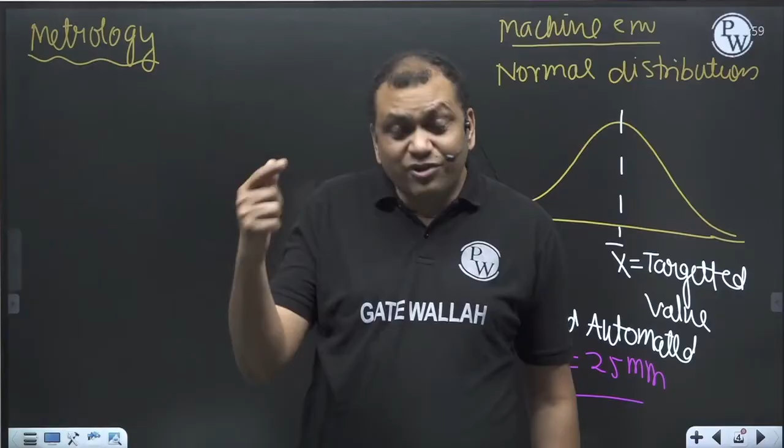So as the products are coming out of the machine, you are inspecting each and every shaft. If you do that, you will get dimensions like 25.023, 24.972, 24.996, 25.004. No two dimensions will match, and there will be variation in the dimension.

You know why? Because machine error follows a normal distribution. This is 3 sigma on this side, 3 sigma on this side, and within 6 sigma, there will be 99.73% of components - this is the standard deviation.

The sigma, or standard deviation, depends upon the type of machine, number one. If it is an NC or CNC, sigma will be less; if it is a conventional machine, sigma will be more. Number two, standard deviation also depends upon the skill of the operator. If the operator is highly skilled, sigma will be less; if the operator is a new person, sigma will be more.

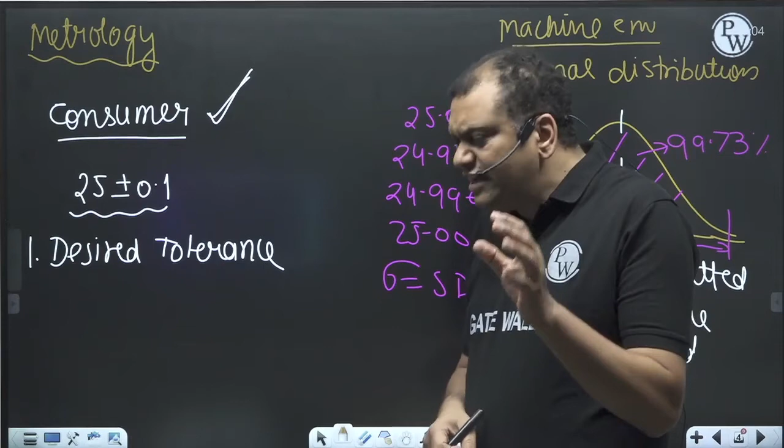So desired tolerances are given by the consumer, correct? And the second is the process capability.

Process capability is nothing but 6 sigma. Sigma is the standard deviation of this normal distribution. The 6 sigma is the property of the machine, and the desired tolerance is the desire of the consumer. Tolerances are the selection of the consumer, and the process capability is the capacity of the machine. If the machine is NC or CNC, 6 sigma will be low. And if the machine is conventional, 6 sigma will be more. I hope this is clear.

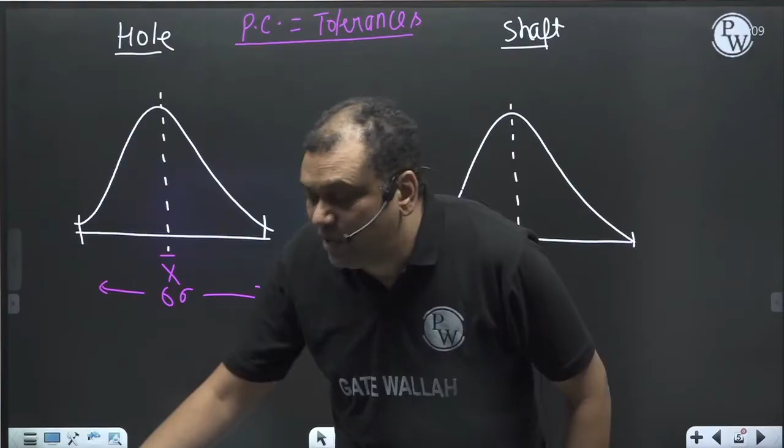Now, randomly if you pick a hole, and randomly if you pick a shaft, random because normal distribution means randomness. Randomly if you pick a hole from the hole lot, a shaft from the shaft lot, assembly can be made without any inspection. Assembly can be made, okay? And this system is called full interchangeability.

So when will the full interchangeability system come? When desired tolerances are equal to the process capability.

Is that okay now? Now, what is a hole and what is a shaft? How to define a hole? Any internal feature of assembly, which may not be circular, is called a hole, and any external feature, which may not be circular, is called a shaft.

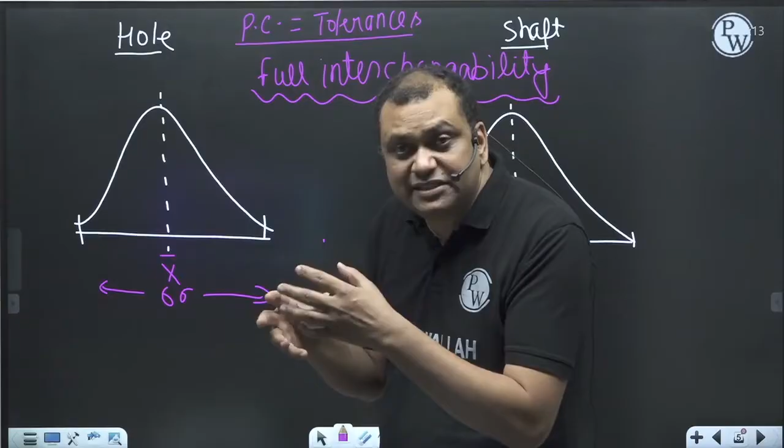How? Suppose there is an assembly, and during service the shaft fails. You don't have to throw away the entire assembly. Just purchase another shaft from the market and fit it. Maintenance becomes cheap and easy this way.

It will work, so we want a fully interchangeable system. But in the real production scenario, process capabilities are more than the desired tolerances. That is the reason I am not able to get a fully interchangeable system, because process capabilities are more than the desired tolerances.

So now what to do? Let us take one example. Process capability is 4 times the desired tolerance. This particular example is taken practically in all the possible books.

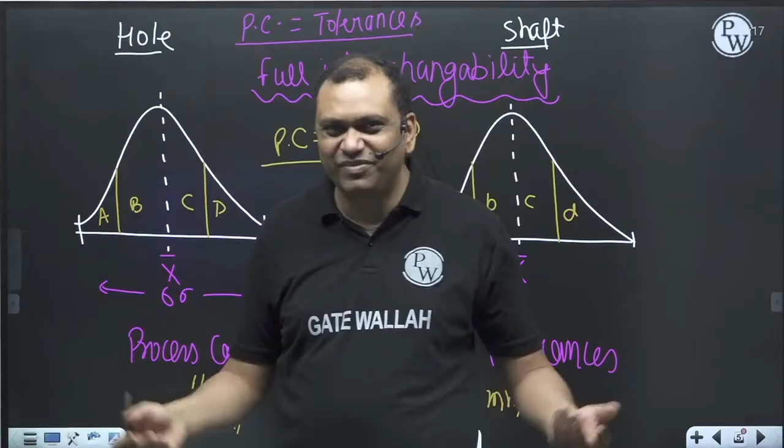So this is 25, 25.1, 25.2, 24.9, 24.8, and the same for the other: 25.1, 25.2, 24.9, 24.8. So do you know what I'm going to teach you now?

What I'm going to teach you now is practically how you are going to break the process capability into 4 equal parts. As the shafts are coming out of the machine, I will inspect each and every shaft, and as per the dimension, I will place it in the respective subgroup. I will have 4 drums: drum A, drum B, drum C, and drum D. Let us say the dimension is 25.16 — put the shaft in drum D. If the dimension is 24.92, drum B. If it's 24.89, drum A.

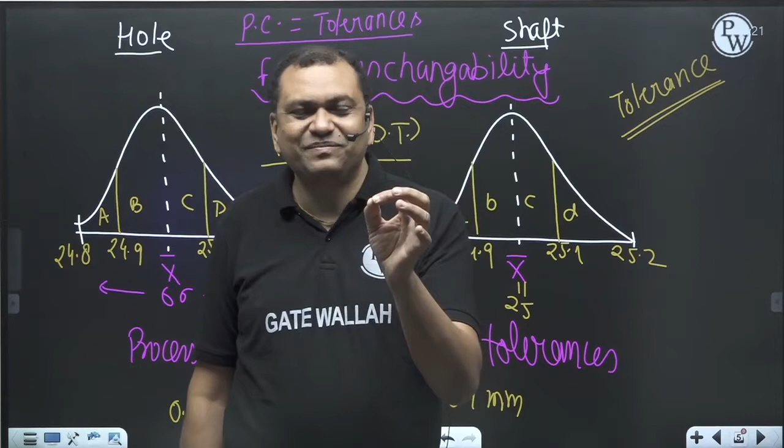Whenever I use this term tolerance, I always refer to a group of components, not a single product. Tolerances are for a group of components, not a single product. Tolerance tells you that in this subgroup, this will be the variation in the dimensions of the product.

So now each and every subgroup will have few pieces. And the beauty is that in each and every subgroup, variation in the dimensions are equal to the desired tolerance. By doing this procedure, each and every subgroup is having variation in the dimensions equal to the desired tolerance.

So if you pick a shaft from subgroup small a, and if you pick a hole from subgroup capital A, assembly can be made. Why can the assembly be made? Because the dimensions are within the desired tolerance. If you pick up a shaft from subgroup small a, hole from subgroup capital A, because the variation in dimensions is equal to the desired tolerance, assembly can be made.

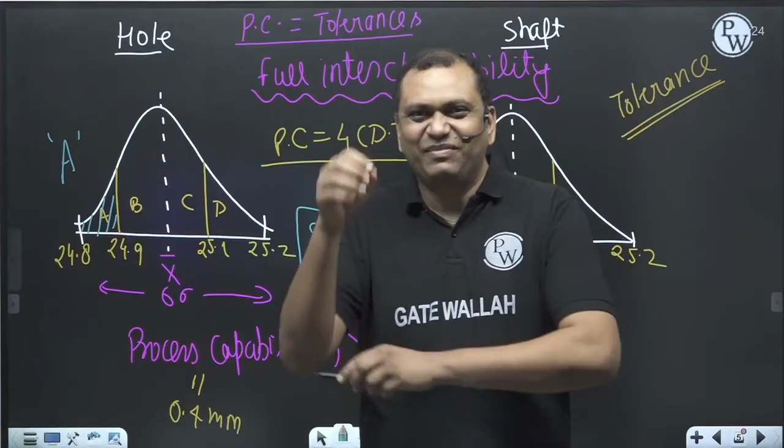So it's a very, very important thing, because it's a recorded lecture, I am not able to see all of your faces. Always remember, if you want to learn anything, respect teachers, respect parents, respect elders. If you disrespect them, immediately the learning process is blocked.

But one more question is there. Of course, parents we have to respect. Elders and teachers, if they have bad character - because nowadays everybody can become a teacher, it is driven by money in most cases - if they have a bad character, please do not respect them. Otherwise, bad character will go to your heart. If you respect by heart a person having bad character, those bad qualities will come to your heart. So please remember this very, very important thing.

I teach students because I consider them as my children, and I really love all of you, because you will be seeing these recorded lectures. So this is a very, very important concept. Please follow this, and you will always be happy in life. Many people are giving short lectures and all that about how to be happy, but you cannot be happy unless and until you do this thing.

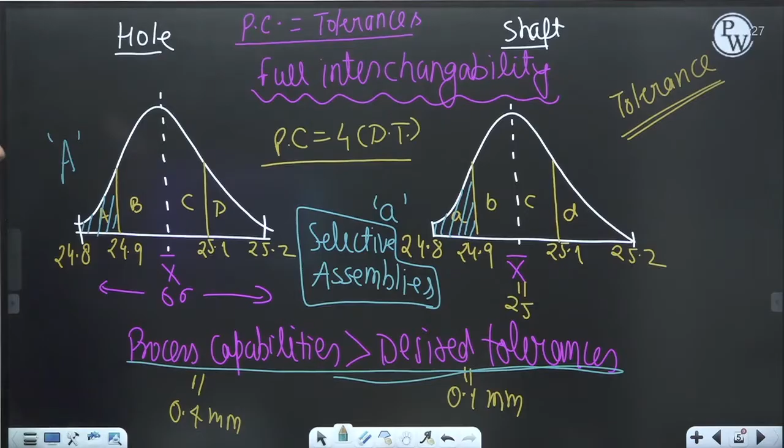So next, just a minute, because I drink a lot of water. Since childhood I have this habit of drinking a lot of water. It keeps our health in a better way.

Let us say in any assembly you are using shaft from this subgroup. Because of some reason, let us say the shaft fails. Then what you will do is go to the market. In Delhi, that hardware market is Chawri Bazar behind Jama Masjid, and in Hyderabad, it is Raniganj.

I don't know which city you are in, but every industrial city will have a hardware market. So if you go to the market, you have to give three pieces of information to the shopkeeper. Only then will he pick the right product and give it to you.

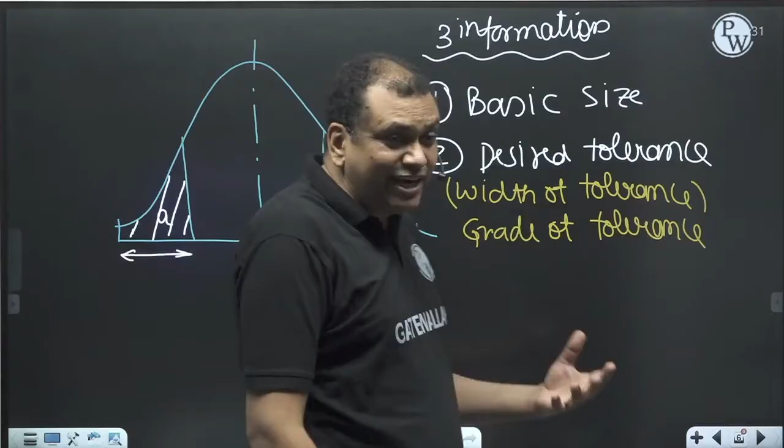Second thing you have to give is the desired tolerance. Desired tolerance is also called the width of the tolerance zone, and the width of the tolerance zone is also called the grade of tolerance. All three have the same meaning. So the second information you have to give is, what is the grade of tolerance? Is that okay with everyone?

And the third information you have to give is how far the tolerance zone is situated from the basic size. This distance, this is the basic size. So how far is the tolerance zone situated from the basic size? It is called the fundamental deviation.

So what is the definition of fundamental deviation? It is the distance between the basic size and the limit closer to it. Or in other words, how far the tolerance zone is situated from the basic size. It's called fundamental deviation, or fundamental deviation is the distance between the zero line, which is the basic size, and the limit closer to it.

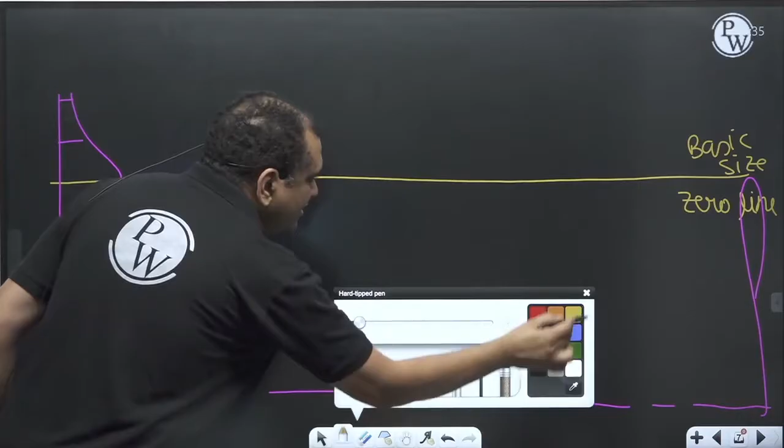So dimensions are increasing in this direction: A, B, C, D. This is 25, this is 24.9, 24.8, so A is between 24.8 and 24.9. It's the diameter of a shaft, 25. So A will fall here, then B, C, D. If I take it out, this is the tolerance zone.

Dimensions are increasing in this direction. Tolerance refers to a group of products, not the individual product. So what tolerance tells you is that in this subgroup, this is the maximum size and this is the minimum size. This is also called the upper limit, and this is called the lower limit.

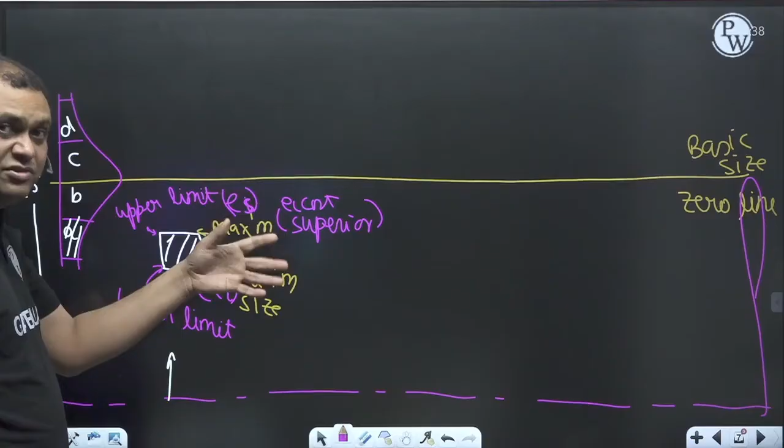So suppose the tolerance is here, this is EI inferior, ES superior, and in this case this is the fundamental deviation, and here this is the fundamental deviation. So fundamental deviation is the distance between the zero line and the limit closer to it. It can be the lower limit or it can be the upper limit. So whatever limit is closer to the zero line, that distance we take to quantify fundamental deviation.

So fundamental deviation is the distance between zero line and the limit closer to it. It can be lower limit or it can be upper limit, depends upon where is our tolerance zone, below the zero line or above the zero line.

When the tolerances are only on one side, either like this or like this, it is called unilateral tolerances. When the tolerances are only on one side of the zero line, either this side or that side, it is called unilateral tolerances.

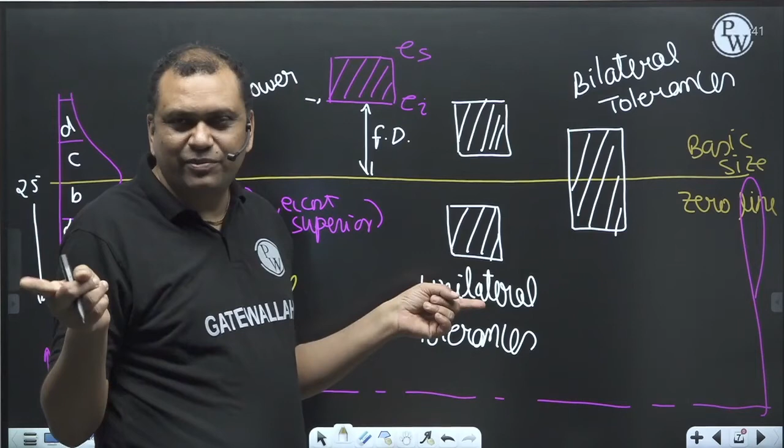So once again, tolerance means a group, not the individual component. And when the tolerance is spread on both the sides of the zero line, it is called bilateral tolerance.

Now, there is something called fit. Fit is called quality of assembly. In other words, relationship between hole and shaft before assembly is called fit.

Okay, and there are three types of fits. Of course there are subcategories, and those who understand Hindi, these things I have covered in the crash course in detail.

Suppose this is your hole, tolerance of hole, and this is the tolerance of shaft. This is the zero line. Zero line is nothing but the basic size.

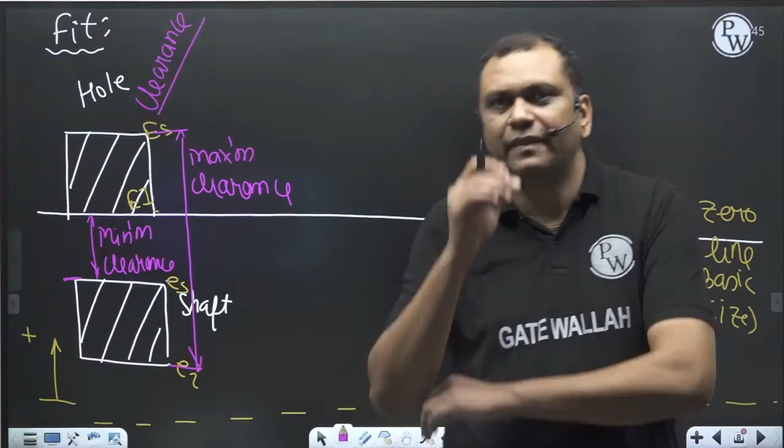Now, based on my experience, students struggle to understand what is maximum material limit and allowance. So I will speak very slowly here.

There is something called maximum material limit, or minimum material limit. I'm explaining what is maximum material limit. The dimension at which hole and shaft will have more weight is called maximum material limit.

So I can say that upper limit of shaft will have more weight, and the lower limit of hole will have more weight in it. So lower limit of hole and upper limit of shaft is called maximum material limit, and these are called minimum material limit.

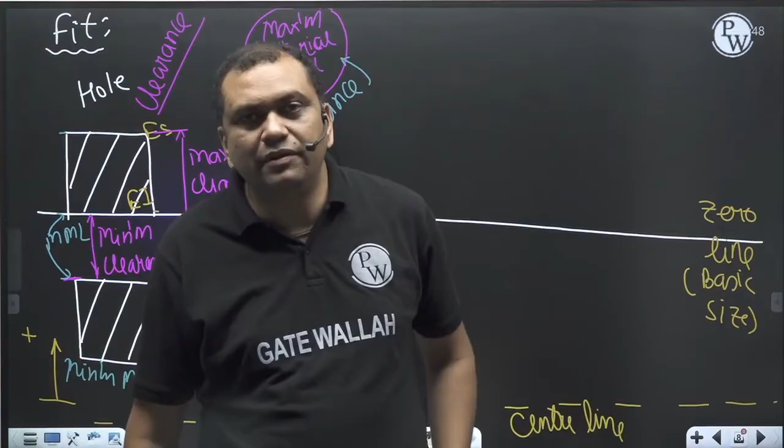Based on this, we define a term called allowance. Allowance is, in any assembly of hole and shaft, the difference between the maximum material limit of hole and shaft. Difference between the maximum material limit of hole and shaft is called allowance.

So here, for clearance fit, this is allowance. For clearance fit, allowance is equal to the minimum clearance. So this is a clearance fit.

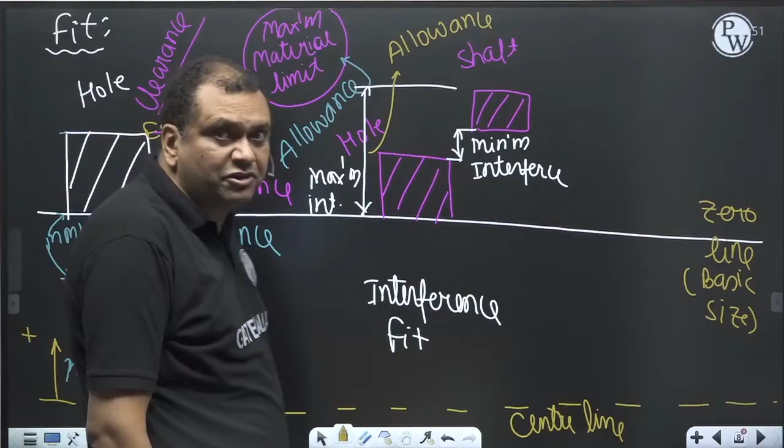And because our allowance definition will not change, maximum interference is called allowance. Definition of allowance will not change. What is the definition of allowance? Difference in the maximum material limit of hole and shaft is called allowance. Difference between the maximum material limit is called allowance, and allowance is equal to the maximum interference.

So interference fit. Now suppose there is an overlap. Let us say this is the hole and this is the shaft. If there is an overlap in the tolerances of hole and shaft, it is called transition fit.

So broadly, there are three types of fit, but each fit is divided into 2-3 subcategories. In one shot, I am not going into the detail of that — in the crash course, I have covered it. But in one shot, between 4 to 4.5 hours, we have to cover all the important topics of metrology and present it to you. That is the target of one shot. So there are basically only three types of fit: clearance fit, interference fit, and transition fit.

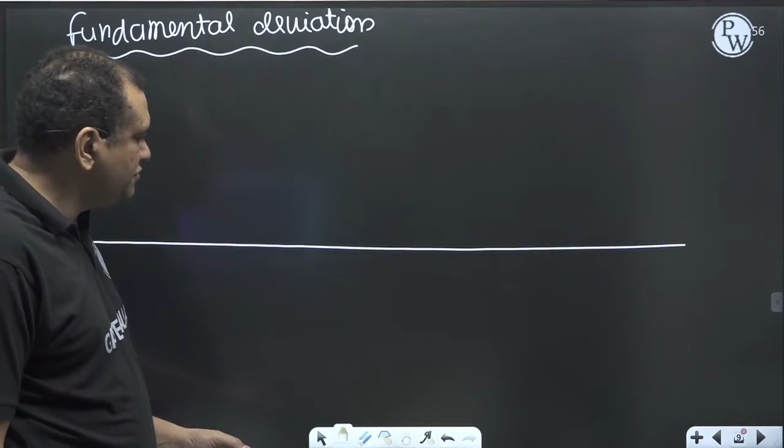So there are 28 different types of fundamental deviations. For holes, it goes like this, and for shafts, it goes like this. So both consumer and producer have to select from this available fundamental deviation — you cannot invent your own, otherwise maintenance will be complicated. A, B, C, D, E, F, G — some letters are missing and some are additional. Let us say A: for hole, we designate by capital letter.

This is the fundamental deviation of type A. So A, B, C, D, E, F, G, H will be here. Some letters are missing and some letters are additional.

For H type of fundamental deviation, see very carefully. Lower limit coincides over the zero line. So fundamental deviation is 0.

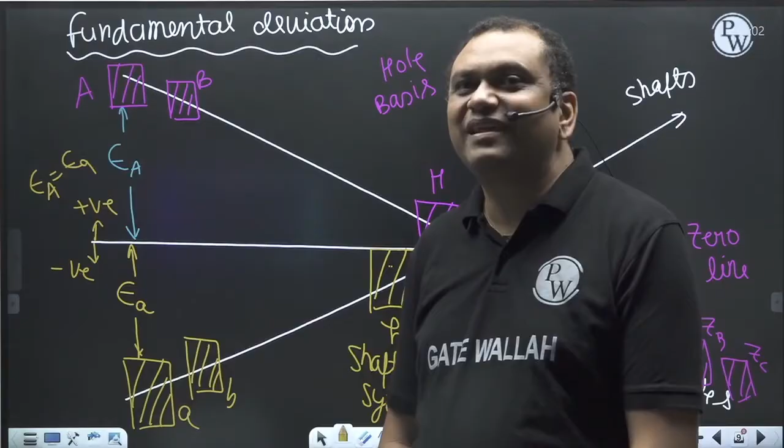Still, we will call it as a hole basis system because hole is my priority. 95% of cases, I make the hole first. So hole is my priority.

So the shaft goes in this direction and the hole goes in this direction. So as soon as the problem is given in the exam, this diagram should come to your mind, that where the tolerances are situated. Very, very important. You should know where the tolerances are situated before attempting the solution of the question.

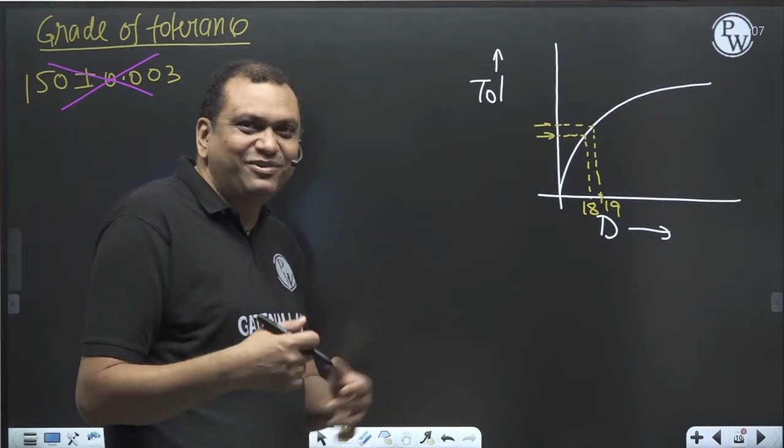So then they came up with an idea. What is the idea? Let us have same tolerances in a certain diameter range. They standardized these diameters: from 0 to 3, have same tolerances; 3 to 6, 6 to 10, same tolerances; 10 to 18, 18 to 30, let us have same tolerances. So in this range, have same tolerance.

0, 3, 6, 10, 18. Let us say this is D1 and this is D2. And this curve is passing through the geometric mean of these two, i.e., D is equals to under root D1, D2. The curve is passing through the geometric mean. That's the reason.

In your BTech you must have mugged up that on the y-axis it is called I. I is called fundamental tolerance. And the equation of this I is: I is equals to 0.45 d raised to power 1 by 3, plus 0.001 d. This is the equation of this curve.

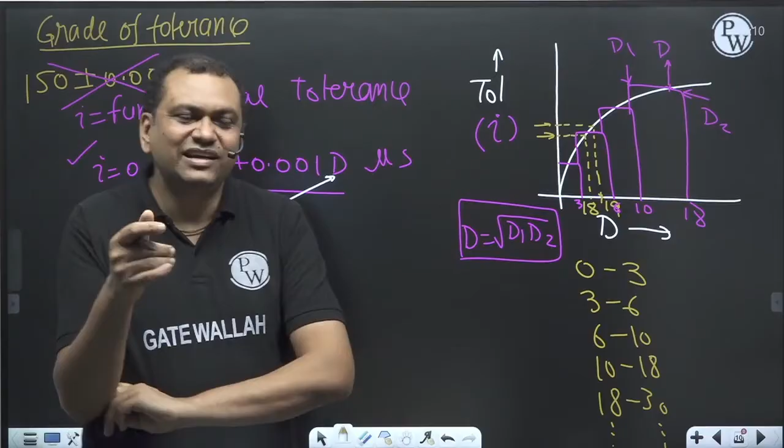So when people were developing this system, every tolerance was integer multiple of I. Integer multiple of I. Every tolerance was integer multiple of I. That's the reason I is called a fundamental tolerance.

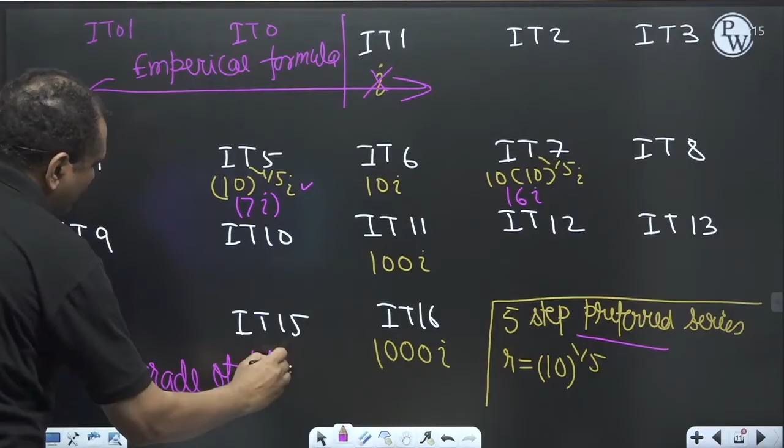Same thing here. Now from IT01 to IT1, they don't follow I — they have given empirical formulas. So there are 18 grades of tolerances.

So both consumer and producer have to select a grade of tolerance out of these 18, and fundamental deviation out of those 28. Both producer and consumer have to select from the available standards. Otherwise, maintenance will be a problem. Correct?

Otherwise, maintenance will be a problem if you don't follow the standards. Okay?

So now, something like this is given to you, 25 H7 D8. In exam, please remember, before solving the problem of limit, fits and tolerances, you have to make the fit diagram.

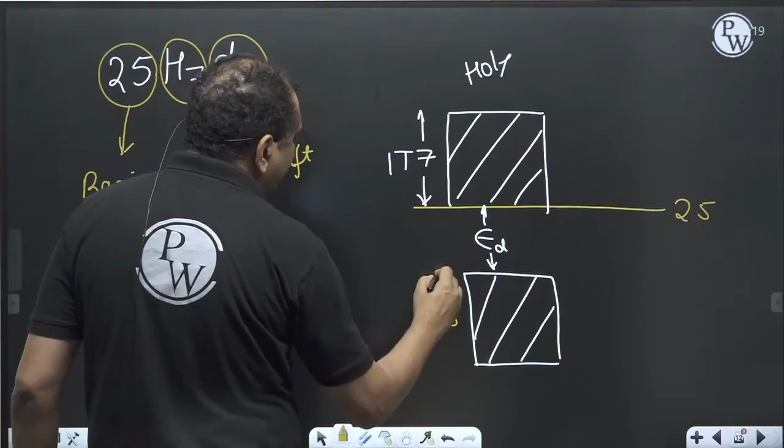D shaft, A, B, C, D, E, F, G, H. So D will be somewhere here. This is the fundamental deviation of D type. 8 means this is IT8. This is your shaft. So this is the fit diagram of this information.

So we can see from here it is a clearance fit. It's a clearance fit.

So once again, please remember, while attempting the questions of limits, fits and tolerances, please make the fit diagram first before answering. Otherwise, there will be a problem. Okay? All right?

We are going to solve some problem after maybe half an hour to see some sample problems.

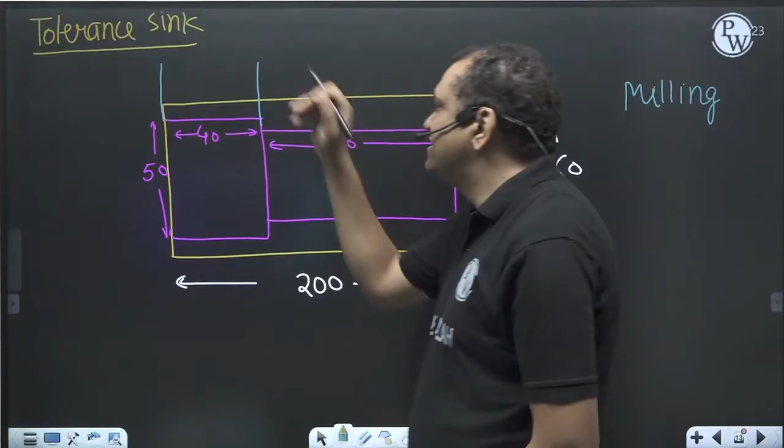In metrology, what we learned, we cannot make anything exact. So you cannot measure exactly 40.

So process capability of machine will appear as tolerance in this section. Let us say 40 plus minus 0.04. Process capability of the milling machine will appear as tolerance in this section. Okay.

Now what you did, you have taken out the semi-finished specimen from the milling machine and put it over a lathe machine. And with the help of a single point cutting tool, you are turning this section.

And once it becomes 35, you are taking this as reference, measure 140, and cut off from here. So 140. The process capability of lathe will appear as tolerance in this section. Let us say this is plus minus 0.07. Okay.

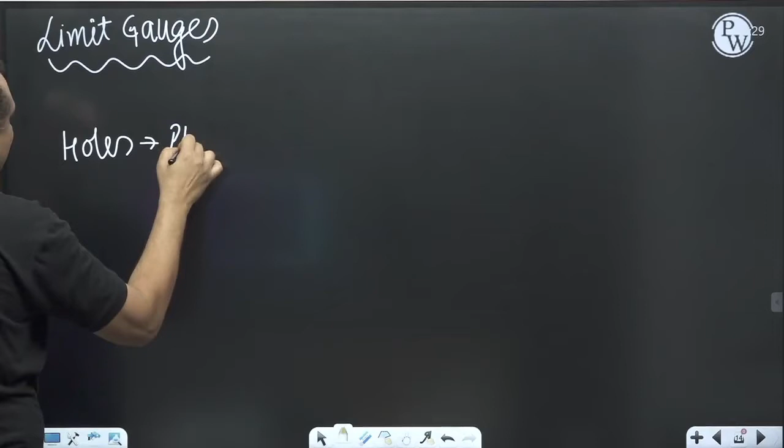Now for holes, we use plug gauges. Plug gauges are like this - it's a handle. And for shafts, we use ring gauges, and the ring gauges are like this. And we are carrying out inspection of shafts like this. So, for shafts we use ring gauges, and for holes we use plug gauges.

Now, both the gauges are of two types: one is GO, another is NOT GO. It is a convention that we use only capital letters.

These limit gauges are designed as per Taylor's principle. Taylor is a very popular personality in mechanical engineering. So what is Taylor's principle? Taylor gave two statements.

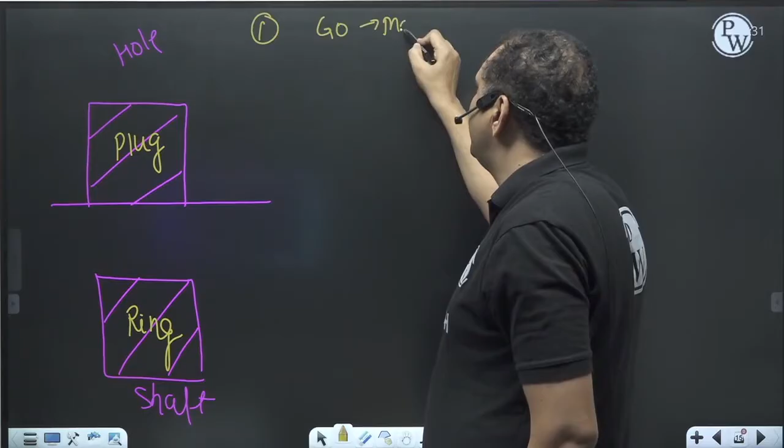GO gauges are designed for maximum material limit condition, and the NO-GO gauges are designed at minimum material limit condition. Meaning, for the plug gauge, this will be the size of GO, and this will be the size of NO-GO. For the ring gauge, this will be the size of GO, and this will be the size of NOT GO.

Okay, I have shown you the geometry - how the plug gauges look like and how the ring gauges look like.

When the GO gauge goes inside the hole, it means the size of the hole is greater than the size of the GO gauge. And when the NO GO gauge doesn't go, it means the size of the hole is less than the size of the NO GO gauge.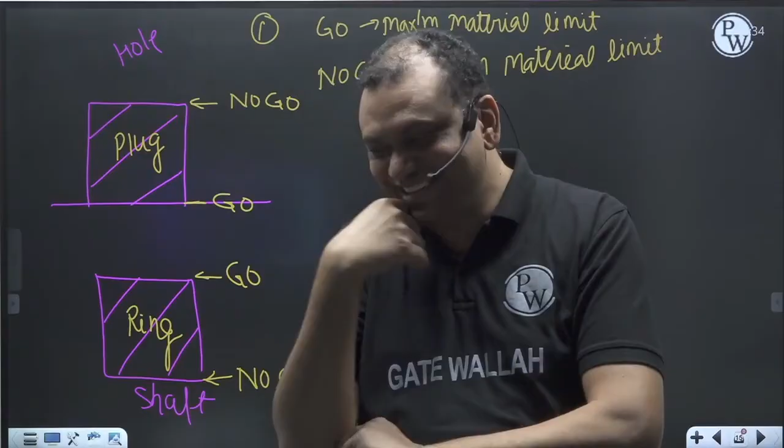But suppose the GO gauge doesn't go - it means the hole is undersized. And if the NO GO gauge also goes inside the hole, it means the hole is oversized.

Same thing will happen for the ring. And when the GO and NO GO are mounted on a common handle - this is the GO part, this is the NO GO part, and this is the handle - these gauges are called snap gauges. Same thing for GO and NO GO ring.

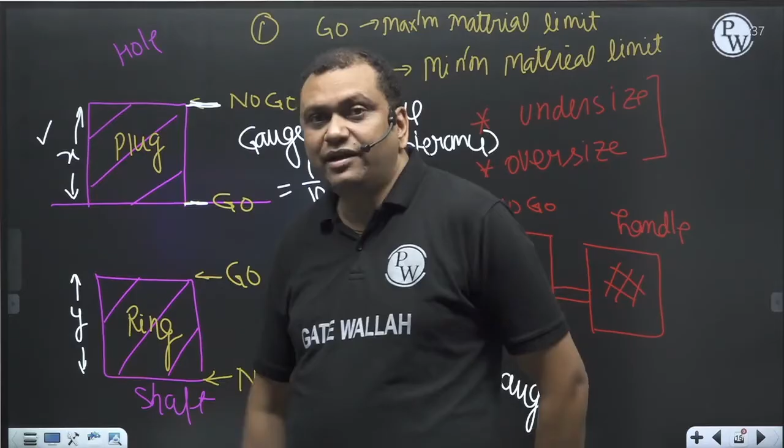Correct? Now there is an issue. To measure the tolerances of hole and shaft, I brought gauges. Now you are saying that there will be tolerance on the gauges. Who will measure the tolerance on the gauges?

Optical flat. Optical flat is like a god. Like in this world, when all the hopes fade, suppose somebody is sick, when all hope fades that he is not going to survive, then the family member says, oh my God, do something. Correct, na? So God is our last hope.

Similarly, in metrology, when all the inspection procedures fail, we remember optical flat, because whatever inspection nobody can do, optical flat can do. So who will measure the gauge tolerances? Optical flat. So this is the first principle of Taylor.

Now the second principle of Taylor. Go gauges are designed to check size as well as shape, and it has to be in the full form, meaning full working length. I will give you some example of that.

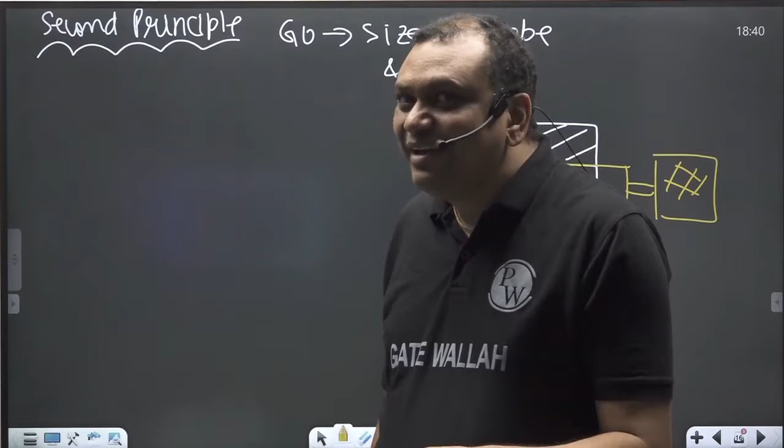Because go gauge every time is moving inside and outside, there will be wear on the go gauge. Not no-go, because no-go gauge doesn't cover the entire working length. So there will be wear on the go gauge.

So we provide wear allowance on the go gauge, and it is 1/10 of gauge tolerance, or 1/100th of work tolerance. Wear allowance will be given only on the go gauge. Please remember one thing.

When the work tolerance is less than 0.1 mm, wear allowance will be 0.001, so almost 1 micron. It is very difficult to provide. So when the work tolerance is less than 0.1 mm, we do not provide any wear allowance.

So this is the second principle of Taylor, that go gauges are used to check size as well as shape. And no-go gauges are used to check one element at a time. Now, what is the meaning of one element at a time?

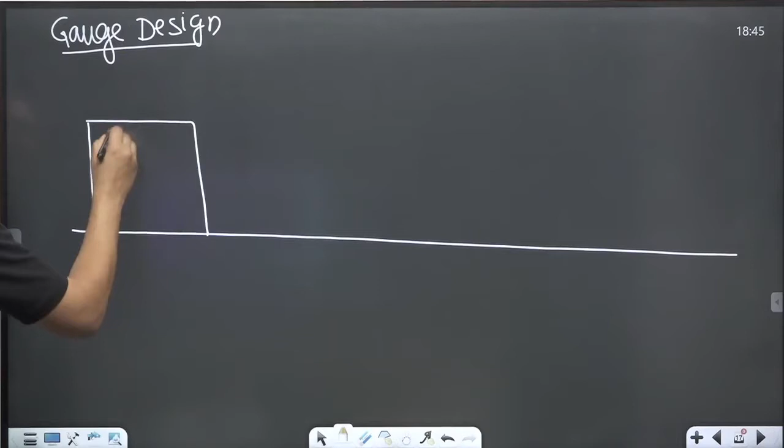Suppose this is the hole, and here is a shaft.

So my plug gauges will be here, and the ring gauges will be here. My Taylor's principle says this is go, no go, go, no go. This is X, this is Y. Y is the work tolerance of shaft and X is the work tolerance of hole.

Primarily, I am teaching you here how you should handle the questions in exam. How you should handle the questions in exam.

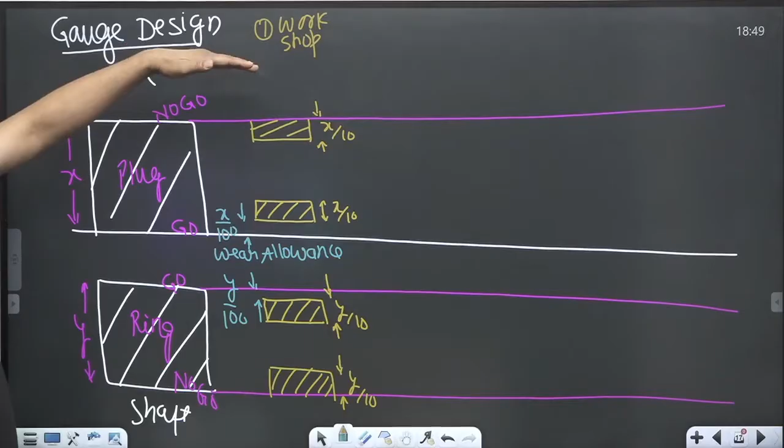So for workshop gauges, tolerance will be towards the work tolerance. In the exam, whenever they say 'design', it means you have to give the minimum and maximum value.

Now, second is the inspection type of gauges. In inspection type gauges, gauge tolerance is away from the work tolerance, like this.

This is ring. If you see carefully, on the inspection type gauges, I have not provided the wear allowance. The reason is, inspection type gauges are already slightly inaccurate, and if you provide wear allowance, it will make them more inaccurate.

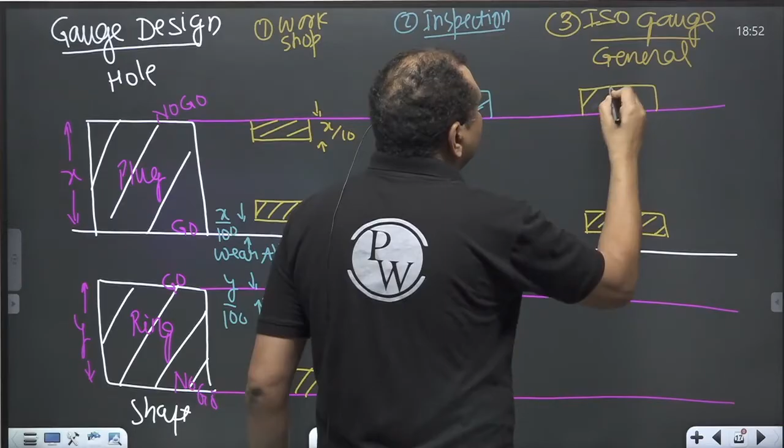In ISO gauge, you take go from the workshop and the no go from the inspection. Go from the workshop, and no go from the inspection.

So once again, these are the one-shot crash discussion. That's the reason I don't want to go very deep into it, because I am not physically there to take care of it. But in the normal class, when we have sufficient time, we dive into it.

Okay, so that was the theory. I hope everybody digested the theory. Everybody registered the theory?

So let us discuss the questions. I will go the same way, I will wait for some time, because if I directly give the answer, what is the fun?

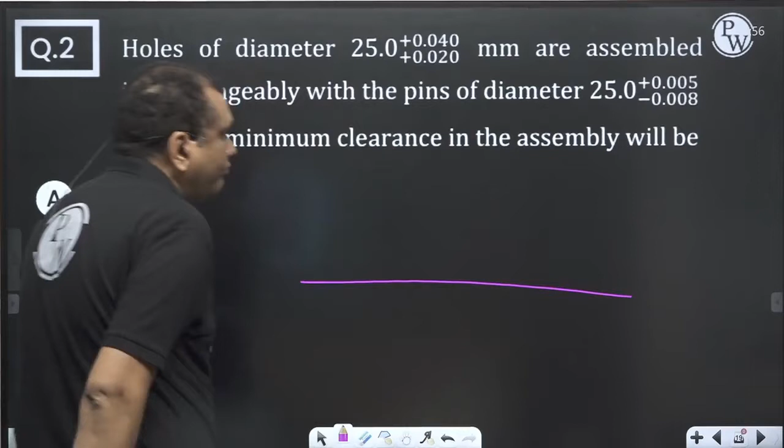Hole. Lower limit is 0.02, upper limit is 0.04, okay? So this is the hole, shaft. Upper, see, this is 0.02 and this is 0.005.

If you do that, the question is going to be very, very easy. The minimum clearance, this is the minimum clearance. Questions are easy, but you should know the trick how to handle them. Questions are extremely easy, questions are very, very easy, but you should know the trick.

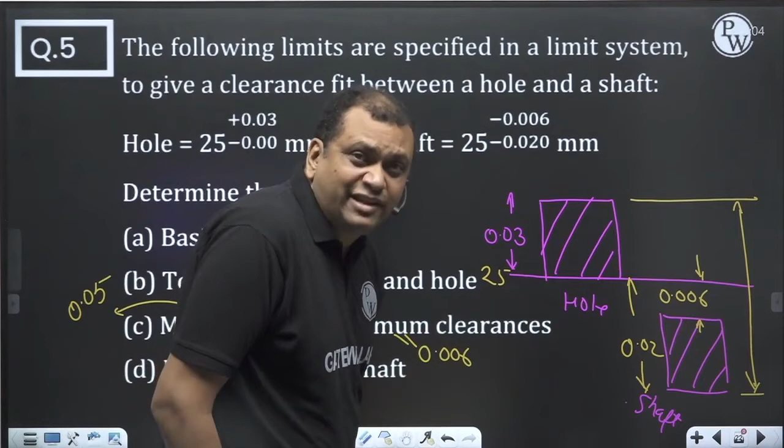Maximum material limit of hole and shaft: the limit at which the material is more is called maximum material limit. So this 25 millimeter is the maximum material limit for hole. And this is the maximum material limit of shaft: how much is it? 25 minus 0.006 comes out to be 24.994, which is the maximum material limit of shaft. So if you have a cool head, these questions are very, very easy.

Okay. Look at the problem first. The tolerance of hole and shaft assembly having a nominal size, nominal and basic size is same for you, are as follows. Make the fit diagram, that will be very, very easy for you after that.

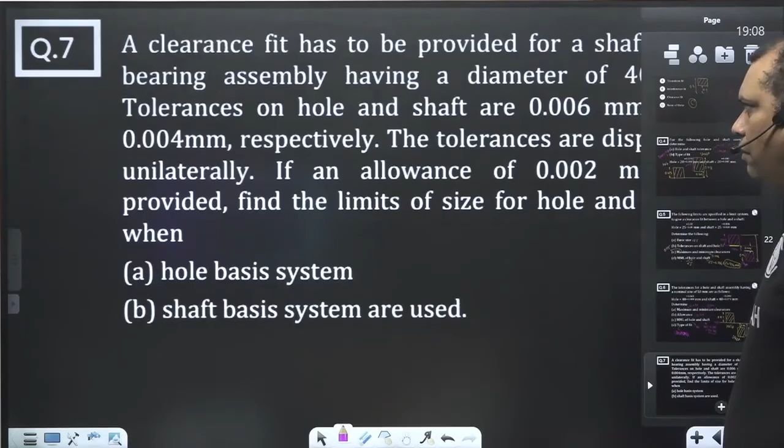So now read the question. A clearance fit has to be provided for a shaft and a bearing assembly. Bearing means you can say it's a hole, having a diameter of 40 mm. The tolerances on hole and shaft are: so tolerance of hole, this is your hole tolerance,

and this is your shaft tolerance. The tolerances are disposed unilaterally. If an allowance of 0.002 millimeter is provided, find the limit size of hole and shaft when hole basis system and the shaft basis system. So let us try hole basis system. Fit is a clearance fit. Such type of question appeared many times in UPSC and once in GATE.

So hole basis system means this is your hole, and hole tolerance is given 0.006. It's a clearance fit, so shaft will be like here. Shaft tolerance is 0.004. Shaft tolerance is 0.004. Allowance is 0.002, so it's a clearance fit, so allowance is equal to the minimum clearance.

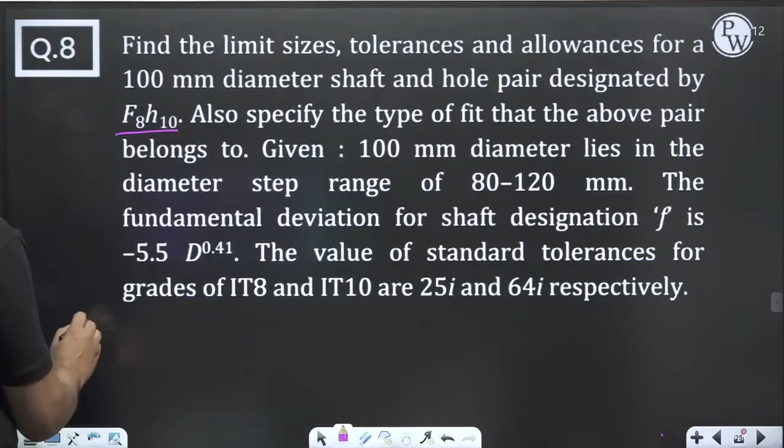See the next question. Find the limit size, tolerances and allowance for a 100 millimeter diameter shaft and hole pair designated by F8 H10. Specify the type of fit that the above pair belongs to.

Given 100 millimeter diameter lies in the range, so D will be under root 80 to 120. I told you why we calculate the geometric mean, because my curve is passing through the geometric mean. And I is 0.45 d raised to power 1 by 3 plus 0.001 d. Input d in millimeter, and output will be in microns.

And fundamental deviation of F type is minus 5.5 d raised to power 0.41 microns. And for IT8, IT10, it is given 25I and 64I.

F8H10, you know what is the meaning of that? 100. This is the hole: A, B, C, D, E, F, G, H, I. And this is the fundamental deviation of F type. And H is here. Small letter means shaft, capital means hole. And this will be IT8, and this will be IT10.

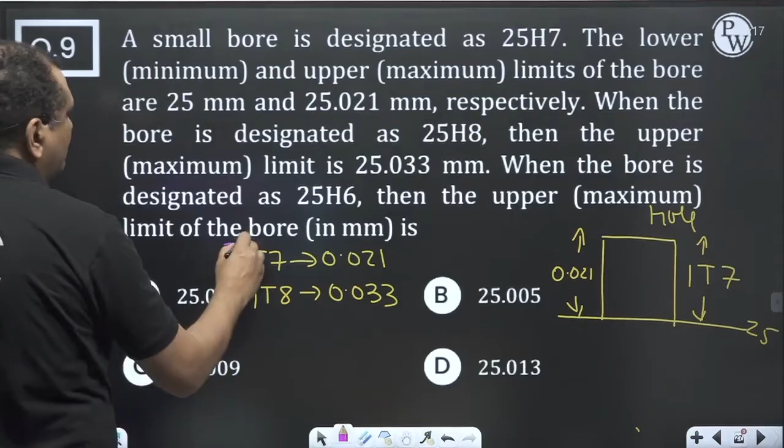And when the bore is designated as 25H6, then the upper maximum limit—I mean your question is asking about the tolerance zone, so you can have the iteration. Because it's a 5-step preferred series, that's what I taught you. So by iteration, you will find it's a D answer. You can solve it.

Yeah, 10th question, please. Read the question, I will give you a break for 30 seconds.

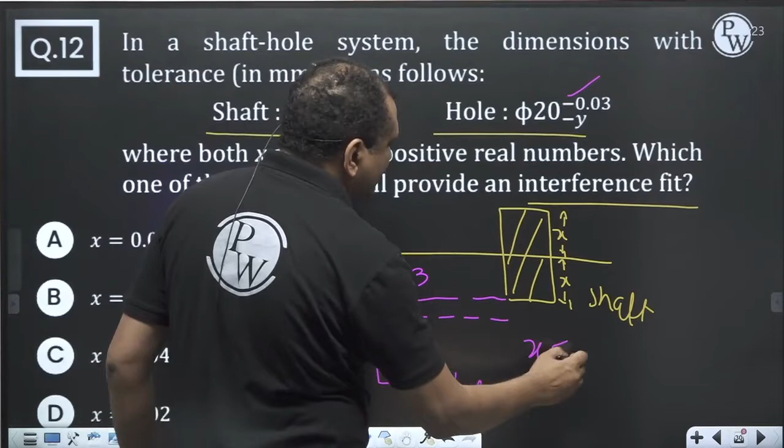It's a shaft. It will be interference fit only when a hole comes here. And hole, this is 0.03, and this is y. So it will be interference fit only when x is less than 0.03.

Out of the given options, only option D is there in which x is less than 0.03. So this will be my answer. Easy question, na?

A cylindrical pin of diameter is assembled into a hole of diameter. This question is a new question. While handling the question, please make sure that the basic size is same. So make the basic size same.

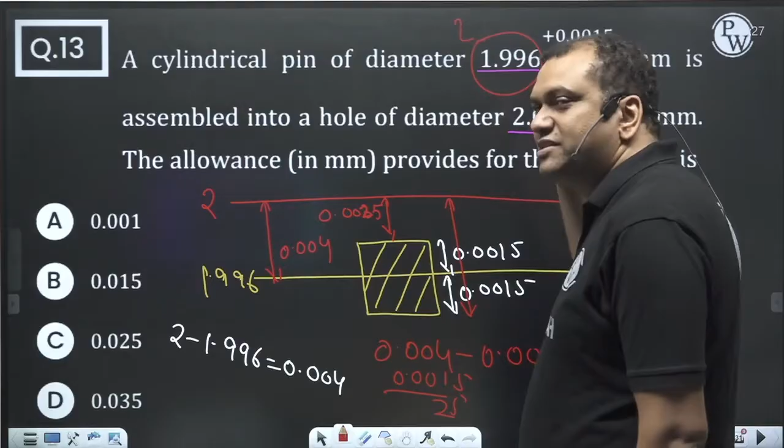So here why I have introduced this particular question is, for hole and shaft, if the basic sizes are different, you have to change the basic size in such a way that this also becomes 2. Basic size should be uniform, and the answer, if you calculate, will be A. In one shot, I am not discussing too much, otherwise it will take 20 hours just in metrology. Anyway, as I told you, some of the lectures are available.

So as I told you, in GATE sometimes the question appears that you don't have to even solve. So be careful about that. This is the question.

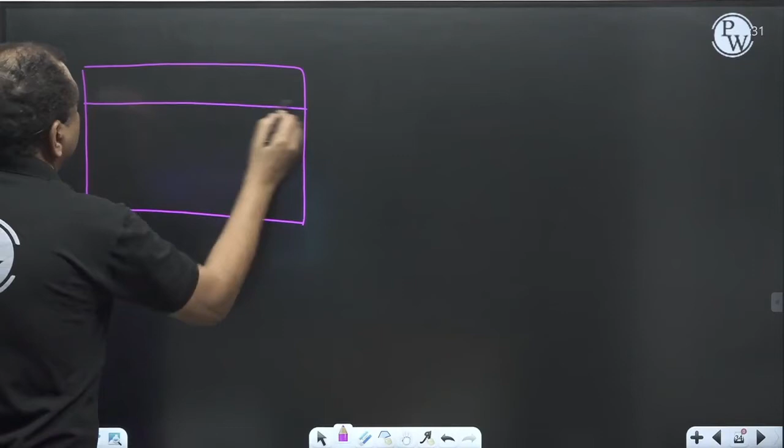Okay, now let us go to the next page. This is the pin, this is the plating, this is also plating, and this is the overall diameter we are talking about. I just wanted to know the tolerance of the overall diameter. So first of all, basic size. Basic size will be equal to 25.015 plus 2 plus 2, so 29.015 millimeter is the basic size.

Now how much are the tolerances? Tolerance, you add up everything: this plus this plus this. So 0.015 tolerance. So D is nothing but 29.015 plus minus 0.015. Okay, na?

Now what the question is telling you, the diameter of the go gauge, it's a shaft. So go gauge is the maximum material limit, and maximum material limit is upper limit. So upper limit is 29.015 plus 0.015, comes out to be 29.03 mm, is the size of go gauge.

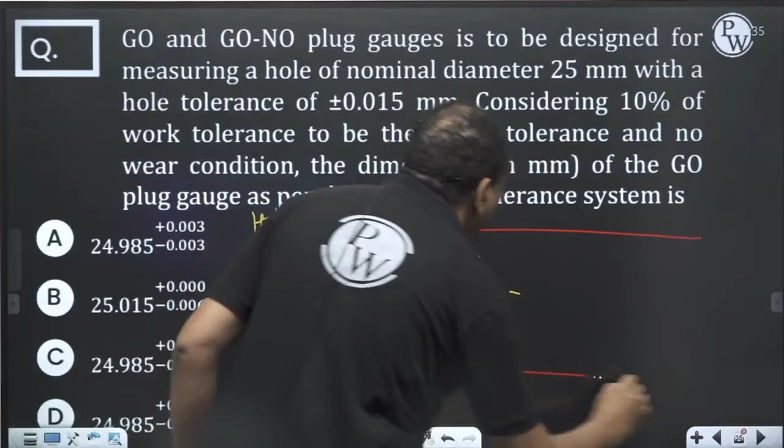Consider the 10% work tolerance, so gauge tolerance will be 1/10 of work tolerance. Work tolerance is 0.03, so 0.003 is the gauge tolerance. It's a hole.

So this will be the go gauge, and this will be the not go gauge. Point 0.003, 0.003. So I have constructed the fit diagram.

Now what the question is telling you, the dimension of go plug gauge as per the unilateral tolerancing system. Unilateral tolerancing system means shift the basic size here. Shift the basic size here.

So basic size will be 25 minus 0.015, comes out to be 24.985. So answer will be 24.985 plus 0.003 minus 0.00. Okay? Is that okay?

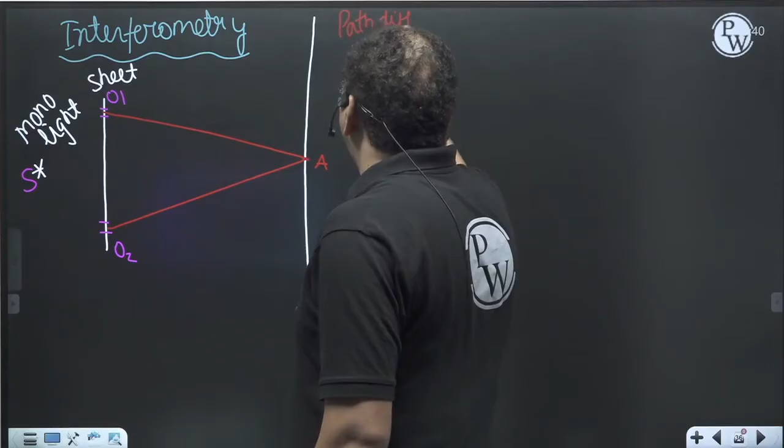At a certain distance there is a screen, and at the center of the screen, let us say at point A, distance traveled by both the rays is same. So path difference is 0, because same distance is traveled by both the rays.

So because the path difference is 0, let us say this is wave 1, the first wave. Both the waves will be in phase. This is the second wave. So as a result of that, their amplitude will multiply by 2. This is your resulting wave.

This is called constructive interference. And as a result of constructive interference, a white band will appear over the screen.

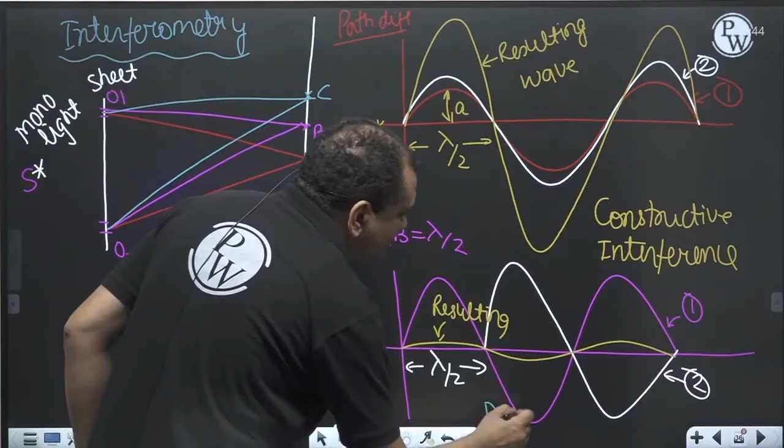Let us say at point B, if the path difference is lambda by 2, this is called destructive interference. Destructive interference, constructive interference, destructive interference. So at point C, if the path differences are lambda, again there will be constructive interference, so a white band will appear.

So white, dark, this side also white, dark - you will get a fringe pattern. In summary, if the path differences are 0, lambda, 2 lambda, 3 lambda, and 4 lambda, you will get a white band. When the path differences are 0, lambda, 2 lambda, 3 lambda, 5 lambda, 4 lambda, constructive interference, you will get a white band.

But when the path differences are lambda by 2, 3 lambda by 2, 5 lambda by 2, and so on, it leads to destructive interference, and hence a dark band will appear over the screen. So 0, lambda, 2 lambda will produce a white band. Lambda by 2, 3 lambda by 2, you will get a dark band.

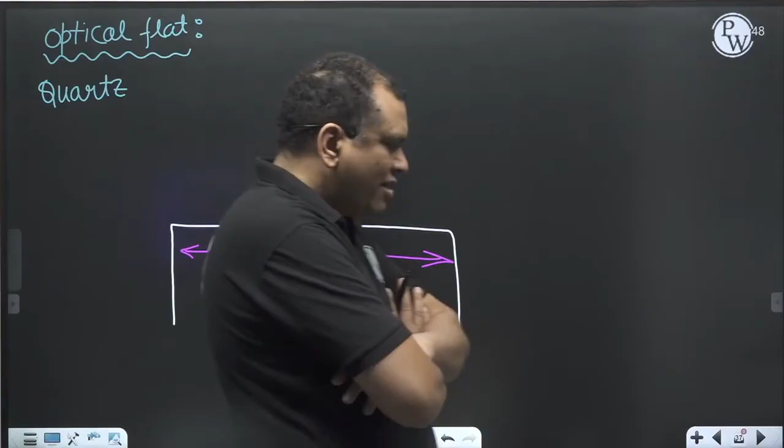So how can this technique be used in measurement? Suppose here is the work, and L is the length of the work. Please hear this very, very carefully. In interferometry, this is the most important concept. So for the next 5 minutes, you should be highly concentrating on the topic, whatever I'm going to teach you.

Put an optical flat over it. Let us say the angle between the optical flat and the work is delta theta. Angle between the optical flat and the work is delta theta, and I would like to measure this angle.

By the way, for your information, this angle will be in seconds. 1 degree is equal to 60 minutes, and 1 minute is equal to 60 seconds. So precise, so precise an angle we can measure. I would like to measure this angle.

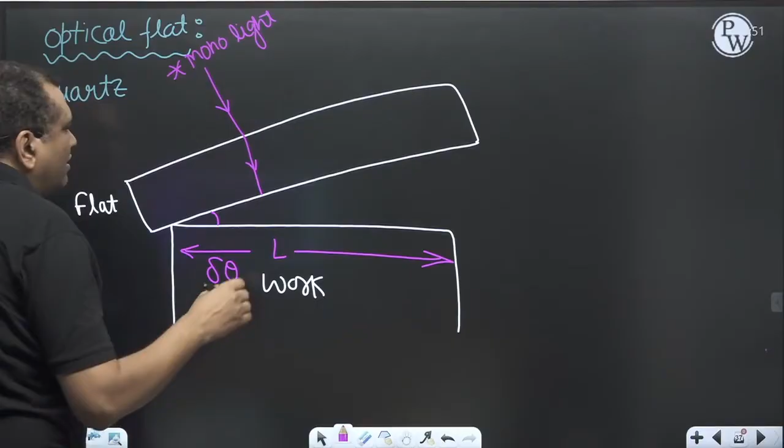So let's say the light wave is coming, monochromatic light again. It will be transmitted. Now it's a property of quartz - whatever I am going to speak is a property of quartz. A portion of this light wave will be reflected from the bottom surface and come out, but a portion will be transmitted.

This transmitted portion will be reflected from the work and come out. These two light waves are nothing but bifurcation of a single wave, but there's a path difference. How much is the path difference? A, B, C - path difference is AB plus BC.

Because of the path difference, you will be able to see a fringe pattern over the work. So when you are going from this side, when it is lambda by 2, dark; lambda, white; 3 lambda by 2, dark; 2 lambda, white - you will see a fringe pattern, because there is a path difference.

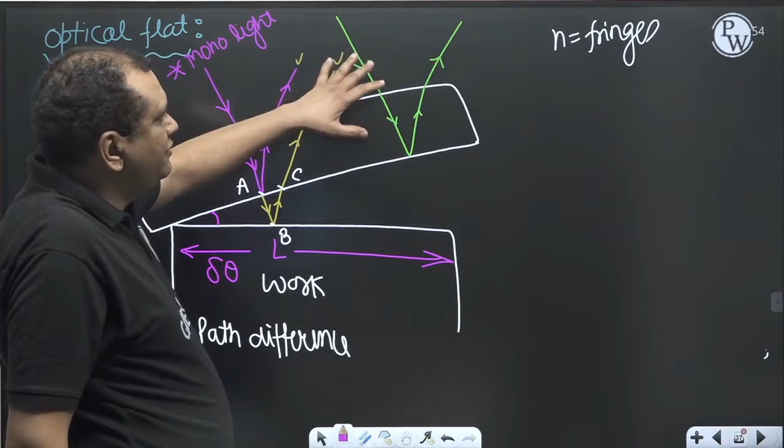When you will be able to see n number of fringes, the last wave that is getting reflected from the surface - this one - the path difference A dash B dash plus B dash C dash should be equal to n lambda.

Because I am getting the white fringe after every lambda path difference, I will be able to see n number of white fringes only when the total path difference of the last wave getting reflected from the work is n lambda. Because at lambda, 2 lambda, 3 lambda, I am getting the white fringes. Whenever I say n number of fringes, it means n number of white fringes.

Now the delta theta is very small, so I can say A dash B dash is approximately equal to B dash C dash, because the delta theta is very small. So can I say A dash B dash is approximately n lambda by 2?

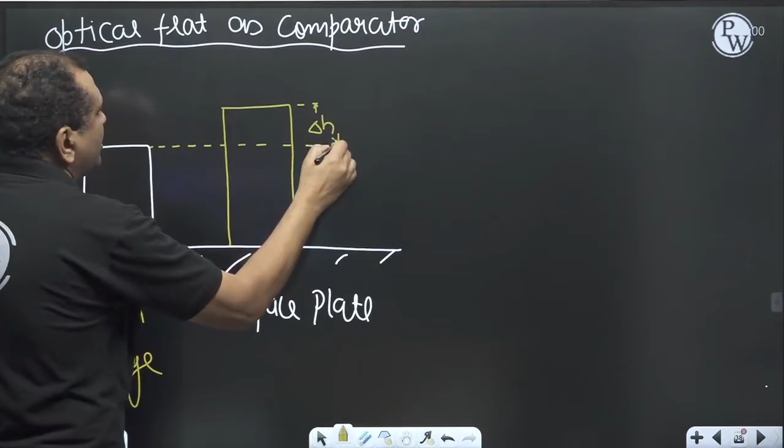And if the variation in the height, delta h, is within the tolerances, I will accept the gauge, otherwise I will throw it away. Let us say there is a gap between the two gauges, and this distance is G. I would like to know what is delta h. If delta h is within my tolerances, I will accept the gauge, otherwise I will throw it away.

So do one thing: put an optical flat over it. After putting the optical flat, you are able to observe n fringes on this slip gauge - A, B, C, D, E.

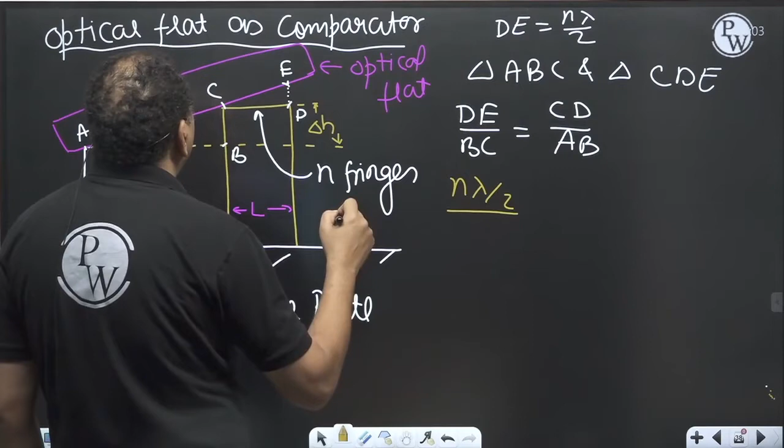So DE is n lambda by 2, BC is delta H that I want to measure, CD is L, and this is G. Check whether it is okay.

Delta H is nothing but n lambda by 2 into G by L. So just by counting the number of fringes, I can tell you what is the difference delta H. And if the delta H is within my tolerance limit, I will accept, otherwise I will throw it away. So that's how we use the optical flat.

Now, how to use these things in numericals? Here I'm discussing 3 PYQs, previous year questions. Otherwise some teacher will say, what you are teaching, it is not in the syllabus. If you don't know anything and want to teach, you just declare it is not in syllabus. I have seen many teachers from last 23 years, certain concepts they don't know, and you know what they will say? It is out of syllabus. Just to scapegoat. I know the pulse of each and every one.

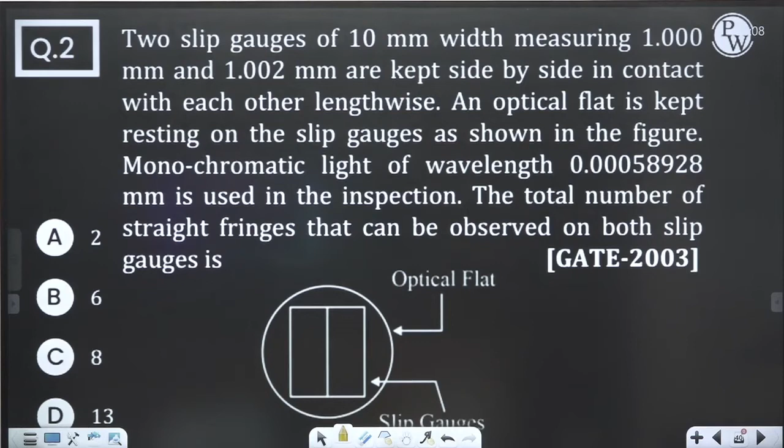See the plan. This is the plan, na? If you see the plan here, the plan will be like this. But in this question, the plan is like this. It means both the slip gauges are in close proximity, so L is equals to G.

So delta H is nothing but n lambda by 2. Directly you can put it here. So the delta H here is 1.002 minus 1, so delta H is 0.002, and lambda is nothing but 0.000589. If we put these things here, value of n will be 6.75.

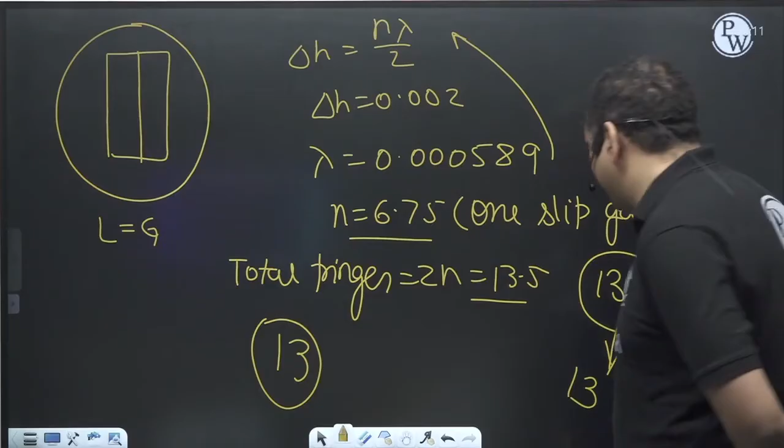It's a GATE problem, and as I told you, these things are in syllabus -- some people said it's out of syllabus. Another classical problem, check it please.

You know what the question is telling you? Suppose this is the surface, this is the surface. If we are keeping the optical flat on this side, there will be some angle, N1 lambda by 2. Okay, because there will be some angle, so N1 lambda by 2.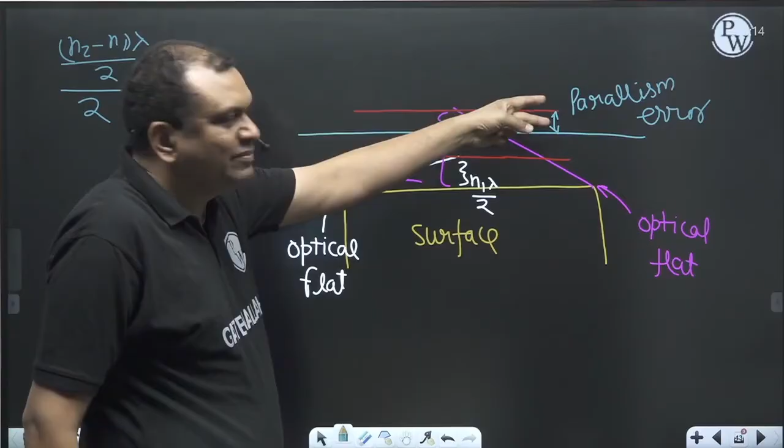This is the difference. Now take the mean. This is called parallelism error. So n2 minus n1, lambda by 2, divide by 2. n2 lambda by 2, n1 lambda, subtract. n2 minus n1, lambda by 2, divided by 2 will be the parallelism error.

So these type of questions appear from interferometry. In the one-shot, I'm not touching precision ball, sine bar and all these things, because one-shot is meant for covering the important topics for GATE 2023. That's why I'm covering only the important topics that I feel. In the crash course, I touched a little more because time was a little more, but here, in 4 hours, everything has to be wound up. That's why we have to take the most important topics from metrology.

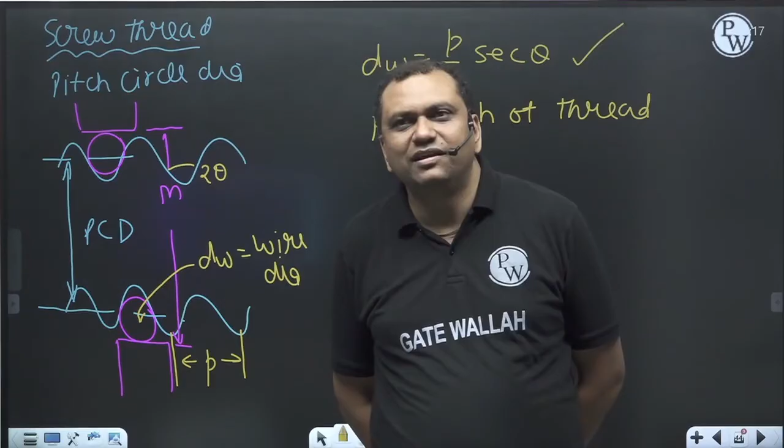So most of the questions in GATE appear from this section. Of course, in the crash course we went through proofs of effective diameter and the calculations, but if you select the most important thing, focus on wire diameter, because calculation of wire diameter has appeared many times in GATE.

In the last part of this one-shot metrology, I want to cover a very important topic for GATE. This is the last topic for one-shot metrology, and questions appear very frequently from this section - and that is surface finish. This topic I want to cover thoroughly because it is important for GATE, and because those watching these recorded lectures should get some benefit from it.

If you record surface irregularities - how do we record surface irregularities? With the help of an equipment called Talysurf, we record irregularities. So let us say irregularities are plotted like this.

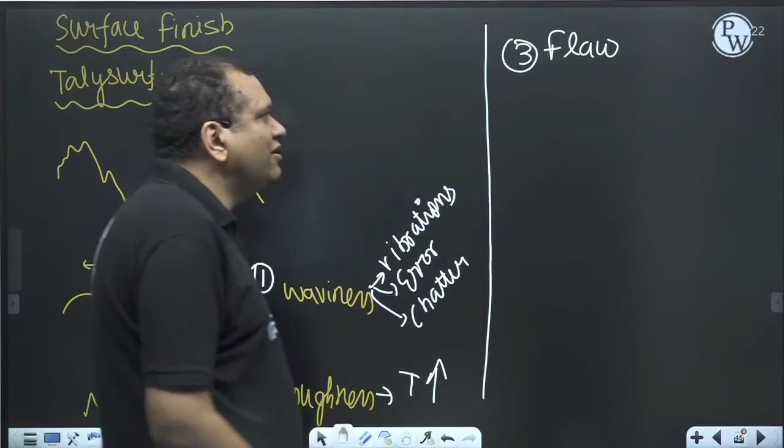Third is flaw. The roughness and waviness repeatedly appear on the surface, symmetrically distributed over the surface, but flaws are highly localized. How does flaw appear in the machined component? If you saw the one-shot course of material science, you must have seen it - in the material there are some compounds, something called intermetallic inclusions.

Intermetallic inclusions are nothing but a type of compound. So during the machining of material, when the intermetallic inclusions come in contact with the cutting edge, the inclusion will come out, and there will be a crater, and that crater is called flaw. So primarily the flaws in machining are due to the appearance of intermetallic inclusions.

Sometimes there is a sudden jerk in the machine, and that may also produce a flaw. So waviness, roughness, flaw, and the fourth thing is called lay.

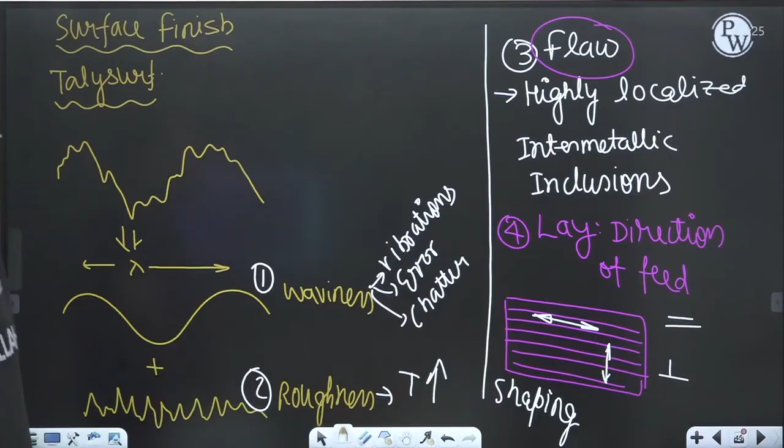Suppose my surface is produced by a facing operation. The surface will be produced like this. This is called circular lay.

Lay, technically speaking, is a direction of feed. Suppose it's grinding. In grinding, abrasives do not have any predetermined tool signature. Abrasives are oriented practically in all possible directions, so you will not get any direction of feed. It is called multidirectional lay, which you get when grinding workpieces.

Let us say it's a knurling operation. So we are making it like this. It is called crossed lay.

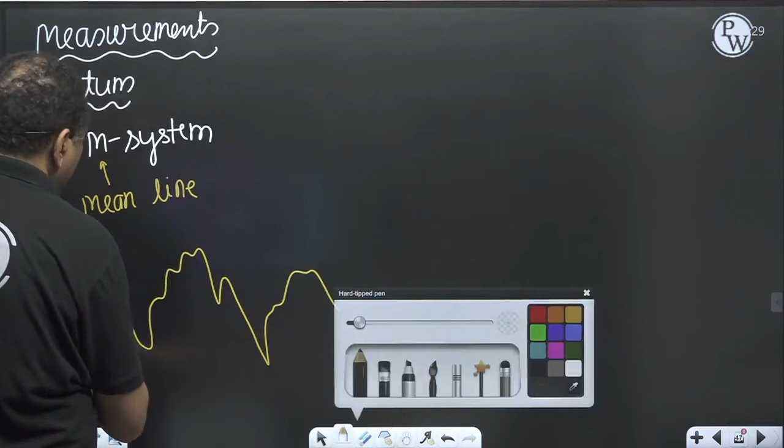You are plotting the surface irregularities. After plotting the surface irregularity, you join the first and last point to get a reference line. This line is shifted in the vertical or downward direction, to the point so that the area above the line and the area below the line are same. Now this line is called the mean line.

In India we follow this system because the British used to follow this system. And when India got independence, our Prime Minister Nehru brought the British system as the Indian system.

Now the second system is the E system, and E stands for envelope. So how do we do it? After plotting the surface characteristic, one sphere of 25 millimeter diameter is rolled over it, and the locus of its center is traced - this is called the envelope.

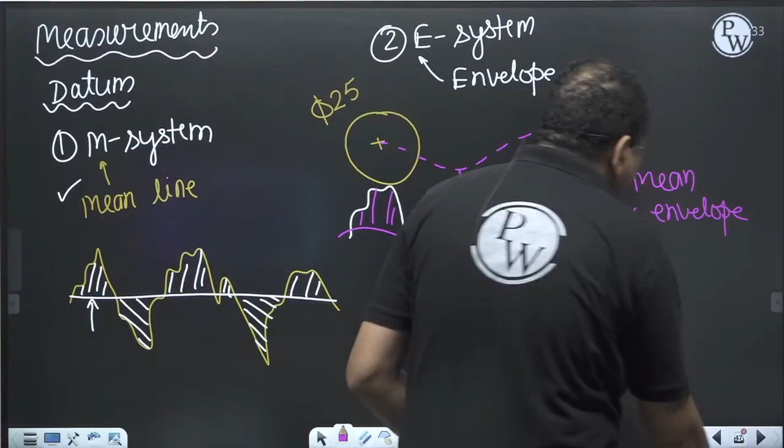Next, quantify roughness. Of course, there are 6 or 7 different methods to quantify roughness, but from an examination point of view, 4 are important.

Peak to valley height is represented by RT, Hmax or Rmax. You have to know actually what is the symbol.

Peak to valley height is: suppose this is the characteristic of the surface. Peak to valley height is the difference between the highest peak and the deepest valley. So it's an easy one.

Second is central line average value. It is represented by CLA or RA.

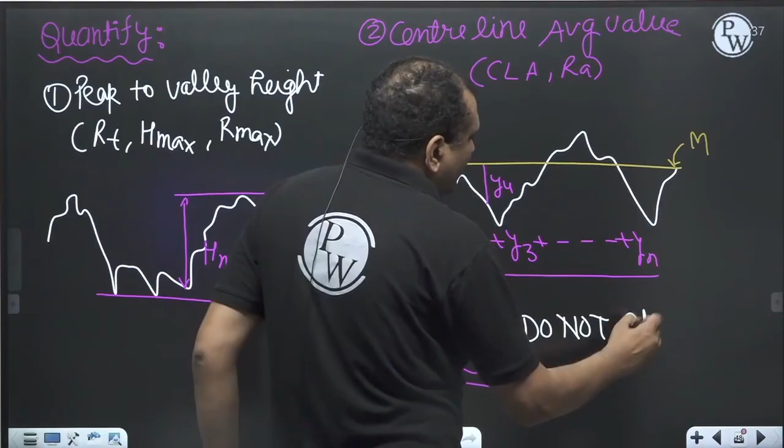This formula, do not apply blindly. This formula, do not apply blindly. Do not apply blindly.

If the number of hills and number of valleys are given to you, don't apply this formula. What I am saying — suppose it is like this. These are all GATE questions.

20 peaks, 20 valleys, 5 micron, 5 micron. So what is the peak to valley height? 10 microns, na? Peak to valley height is 10 microns.

Now let us see what is RA. I will go by first principles. 20 peaks of 5 micron, 20 valleys of 5 micron — how many total observations? 40. So the answer is...

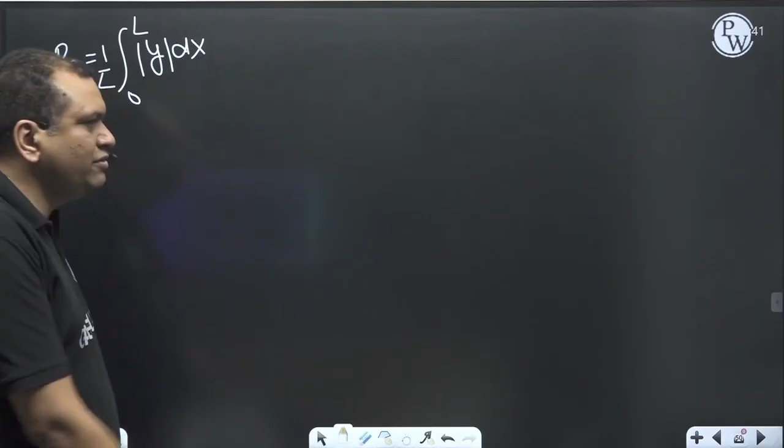The CLA value can be calculated as the integral from 0 to L of y dx, mod y dx. There also we can do it, if the profile is given to you. For example, suppose there is a sinusoidal curve.

So how to find out the CLA value? 0, pi, 2 pi, na? So these curves are the same, so integrate only this much. All right.

Let us say L is the cutoff length. Area above the line is sigma A, and area below the line is sigma B.

Kindly note that if it is a mean line, you have to see very carefully. If the line is a mean line, summation A and summation B will be the same. If it's a mean line, summation A and summation B will be the same. But suppose you have drawn the mean line for this sample...

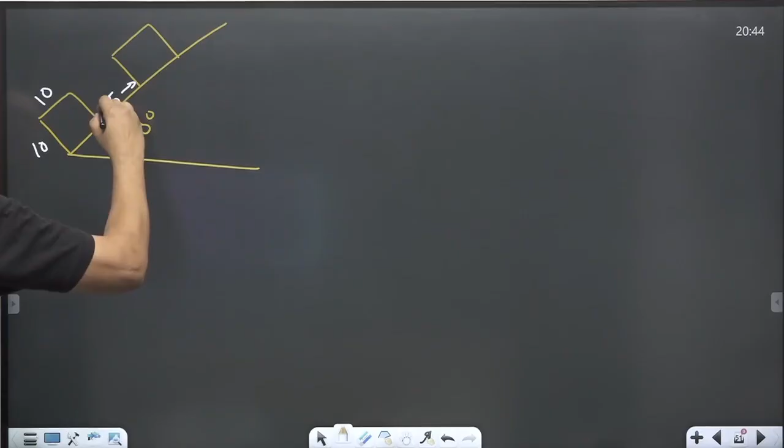Now there are some beautiful problems that appear. This is a gate problem. 30 degrees, ten micron, 10 micron, 5, 10 - from here the geometry is repeating. You have to find out the CLA value. These type of problems appear in gate exams.

Remember one funda here. The funda is, you have to consider the geometry from wherever the geometry is repeating. See, the geometry is repeating from here.

This is the cutoff length. So L will be how much? 10 plus 5, 15 microns. So the CLA value will be within that L. Within that L, how much is the area, both above or below, divided by that L, meaning 10 by 10 divided by 15. So 100 by 15 microns. So 6.67 microns is the CLA value.

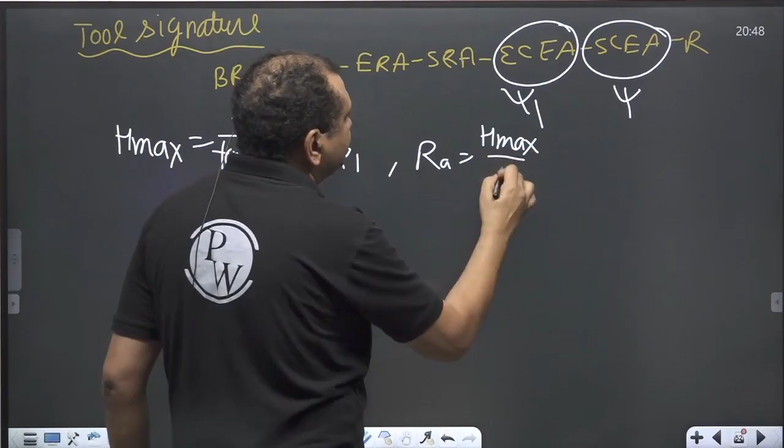And here for CLA is Hmax by 4. So this formula we will apply when the complete tool signature is given to you, and when the feed and the nose radius is given to you. If the complete tool signature is not given, and only the feed and nose radius is given to you, then Hmax will be f square by 8r. So you have to be very, very careful in handling CLA questions.

Now next is central and root mean square value. First was peak to valley height, second is centre line average value, third is root mean square value. RMS value is also called Rq, root of mean of square. Y1, Y2, Y3 - so Rq is nothing but root of mean of square: Y1 square plus Y2 square plus Yn square divided by n.